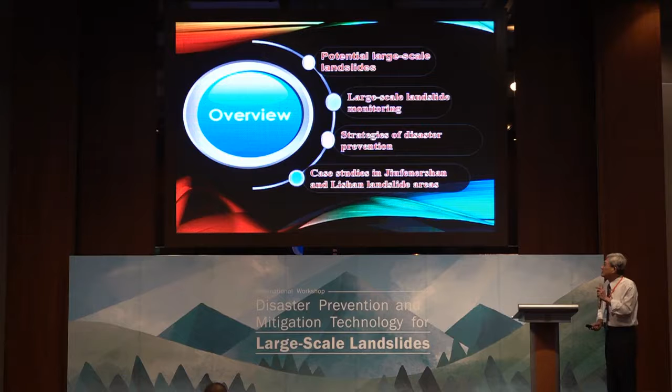I'm going to continue from the potential large-scale landslides and talk about what we can do with those landslides, what kind of monitoring instruments we can apply to identify the risk of a specific site. Then we set up some strategies in facing those landslides, and the government is doing this right now. I'm going to present two very large-scale landslides we have met in the past 20 years. The story is from 25 years ago, and it still continues.

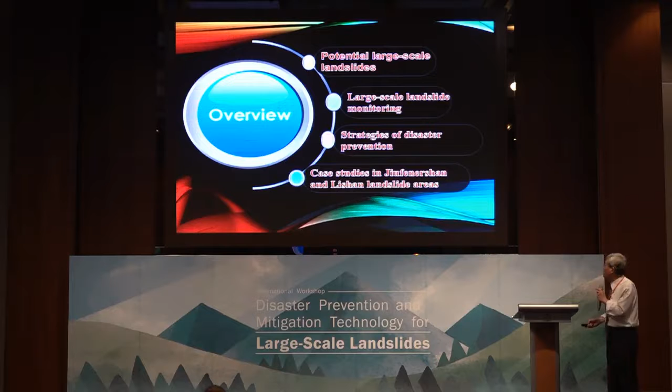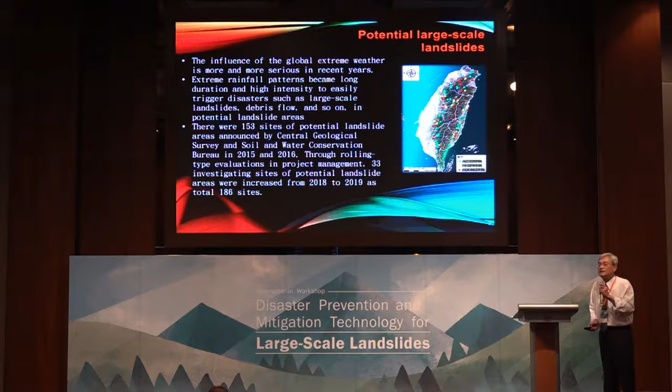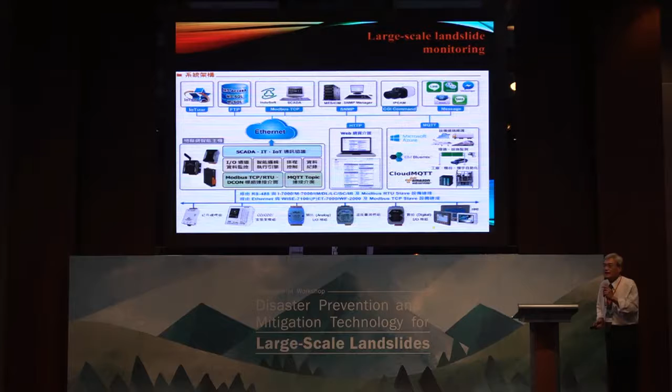You see those dots, a lot of dots, and that means a lot of potential landslides. We chose 186 sites judged as possibly damaging to the human beings in the surroundings. So the government agency applied the network to monitor 34 sites distributed around Taiwan.

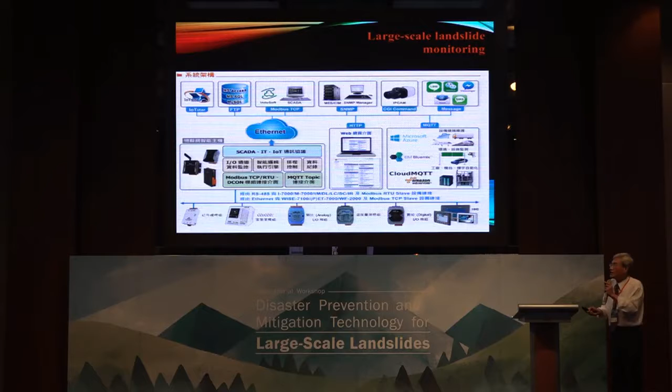We try to come up with all the new technology, including the internet, the recorders, everything, and the cloud. Right now all the monitoring data are on the cloud, so people can access any point at any time. We're still working on it. You can see all the detail in your handout, so I'll go through it very quickly.

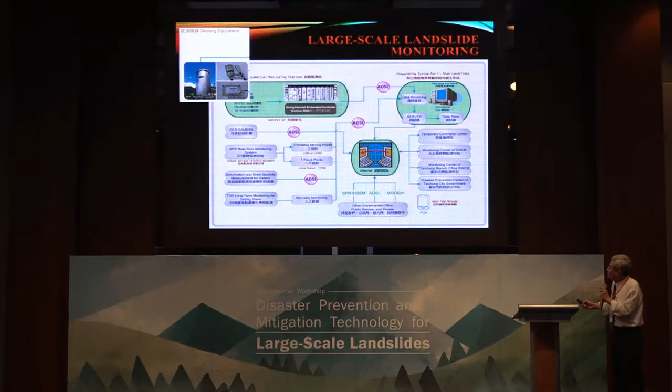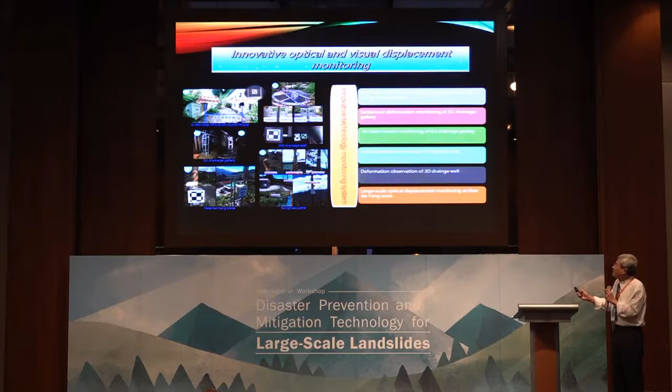The basic instruments we applied include the rain gauge, the two-dimensional inclinometer, and everything you can imagine. And we try to develop more artificial intelligence embedded instruments, including inclination and deformation, which we count on to judge the landslide. That's something we applied. Still too long, so I'll just show you the results.

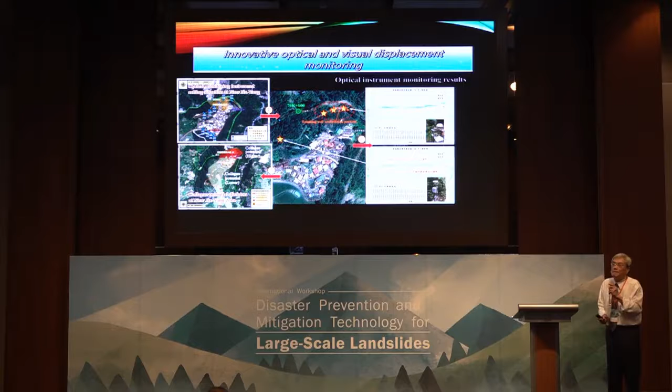This is the result from a site. On the left-hand side you see two pictures; that's the location of the monitored point. To your right-hand side you see two lines of the deformation, and the red dots show the increase of the deformation with time. That's what we have right now at one of the sites.

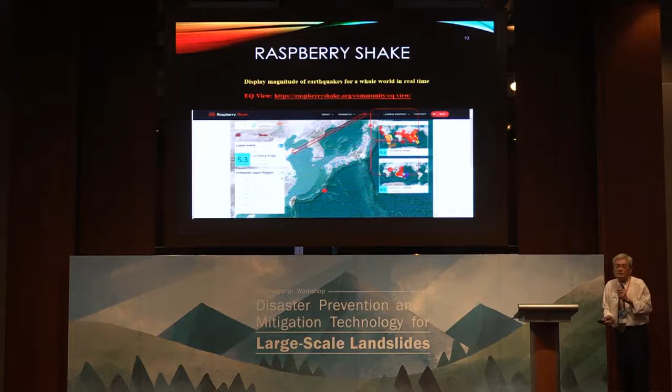We try to employ something from Raspberry Pi. That's the Shake system, a system developed in America. They are trying to put out as many three-dimensional earthquake monitors as possible, and they're now distributed on every continent. They have a cloud to show real-time data at any time from any place, and we are part of it.

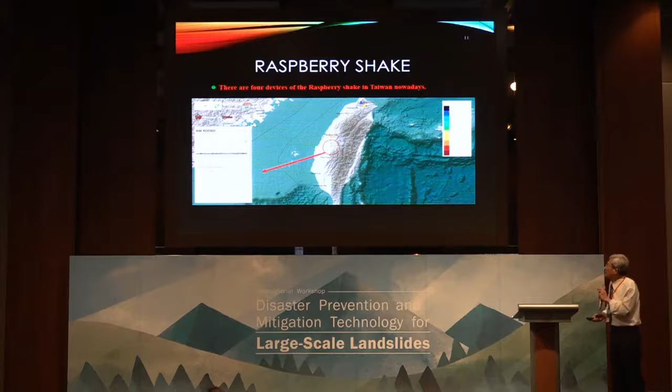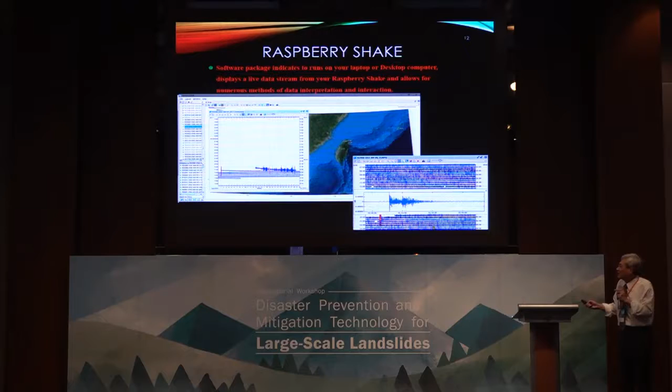Some people may have heard about the recent landslide. We put a few of the Shake systems there, and it really worked and gave pretty good results. This is a seismograph from 80 meters underground in Lishan, and it gives very nice real-time data in the cloud. And there's another system we try to employ, the BBC micro:bit system.

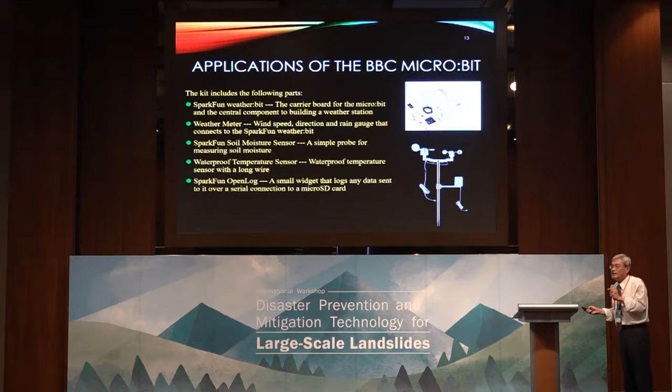This is a very cheap weather station, and it is still on the cloud. They try to have one in every family. If you build a weather station like this, then all the world can see the climate change and everything. It is a very miniature weather station, which works well.

And now, as I mentioned in the beginning, we have so many landslide sites. So what can we do? In order to protect local residents' safety, we set up 7 different intensity activities for strategy.

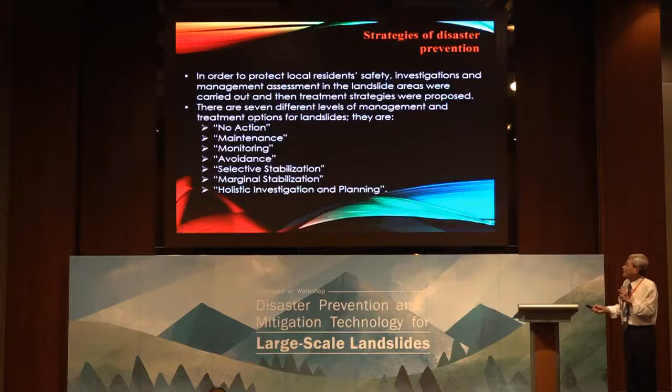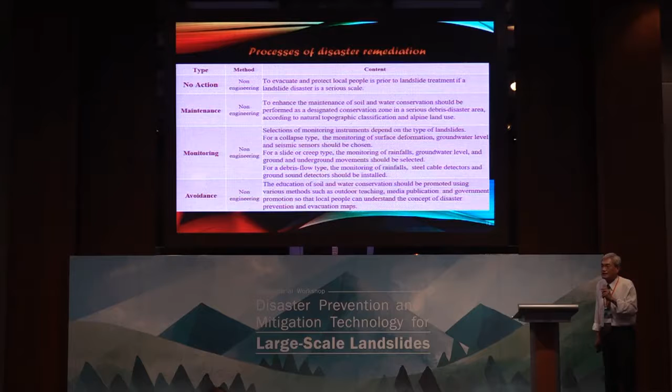Here, from a management point of view, I wrote down the non-engineering activities. First, when we are facing some site that is too huge and cannot be controlled by any engineering device, we suggest that there is no action. You just have to avoid using that kind of land. So you have to just get away.

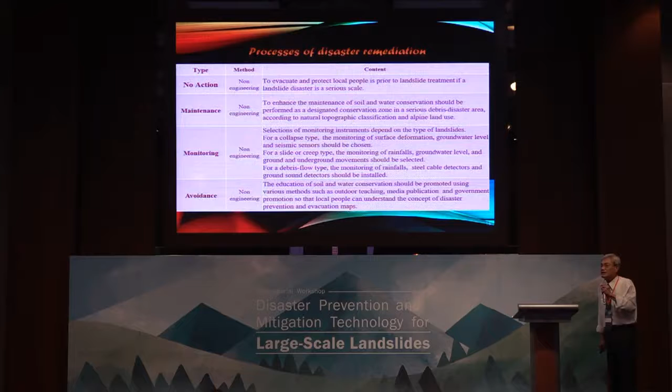In the past, many sites have been performing maintenance activities from the Soil and Water Conservation Bureau. When we're facing a site, we do some management work and just don't let people get hurt. And for some important sites, we suggest a monitoring system is a requirement, and try to use every kind of instrument to protect or to detect the possible disaster, and at least we need to know in advance.

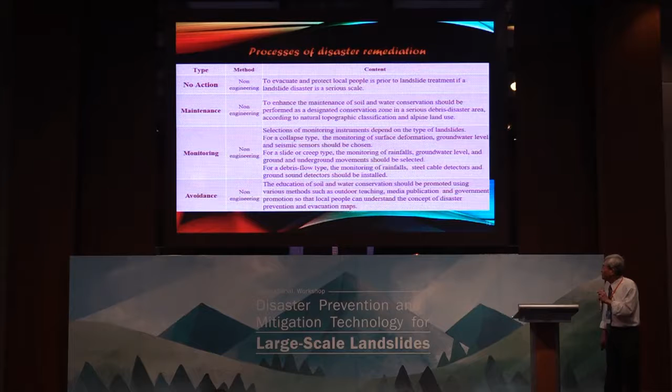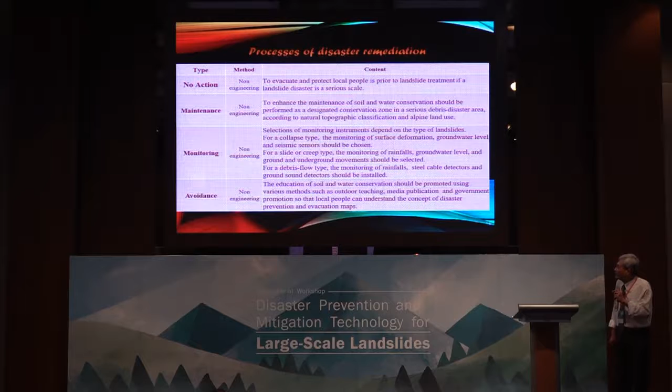The two sites I'm going to present to you are where we did a lot of monitoring work. And the last one is avoidance. For some sites, the Bureau is developing the disaster prevention and evacuation map, just like the title here, disaster prevention. We have all the evacuation maps prepared, and people can just follow what the government suggests and try not to get hurt.

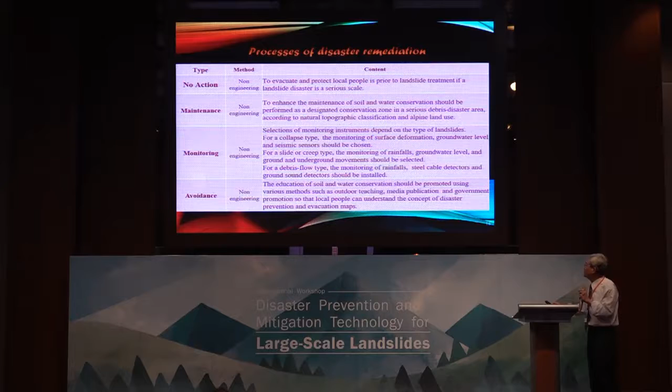And for some sites, they have to perform remediation work. We suggest dividing it into 3 different strategies. First, selective stabilization: we just choose the easy job to do. Second, marginal stabilization, which just tries to protect people from getting hurt. And the last one, when we are facing sites that are so important they cannot be abandoned, we have to perform the full investigation, planning, and all the remediation work.

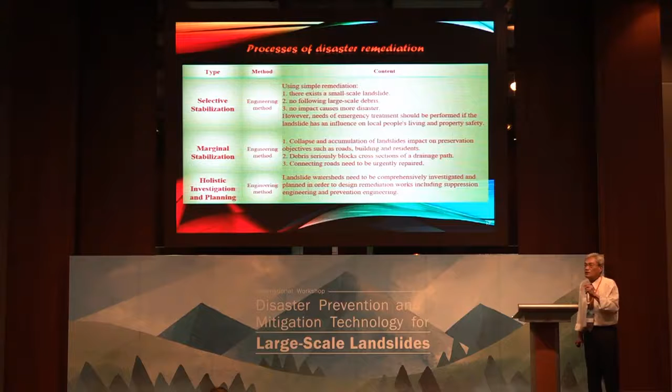So I'll use 2 case studies to present to you the remedial work we can do for landslide sites and the monitoring system for landslides. At the end, I'll talk a little bit about sliding plane monitoring using time domain reflectometry; we just finished some important conclusions, so I'd like to introduce them to you. For the 921 landslide, this is a landslide site that is quite huge.

It happened in the Chichi earthquake, an earthquake-induced landslide, and this is the location of the site, in the central part of Taiwan. This is a picture taken at that time. You see a big dipping slope slid down to the valley, filled up the valley, and formed 2 landslide dams. At that time, people didn't know what we could do facing this kind of large landslide. So the government decided there was not much we could do, so we built a spillway.

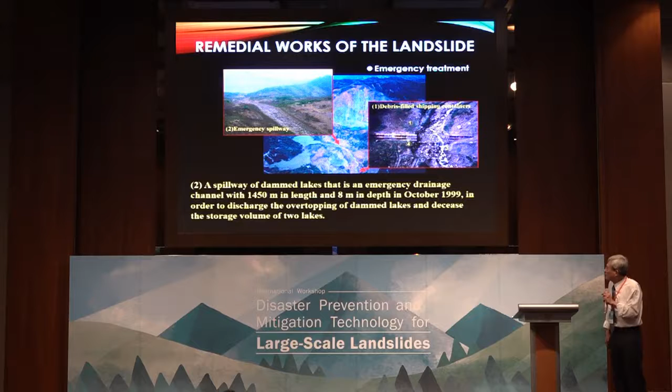That is what happened in 1999, some 20 years ago. We're going to have a 20-year memorial, maybe a meeting about that.

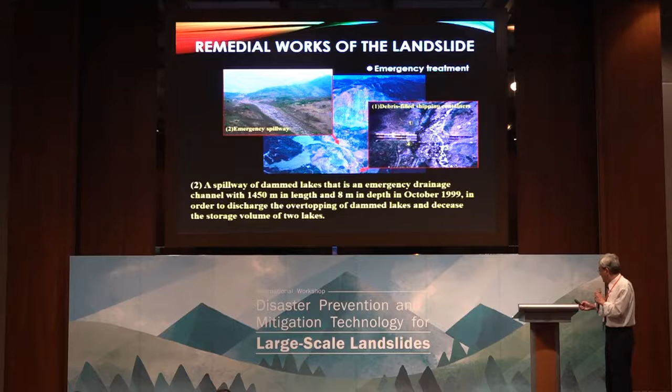The government set up the mitigative measures, and after that we tried to check the stability of that spillway. After the spillway, the government built 20 column-type submerged dams. That is what you see in the picture, the small ones.

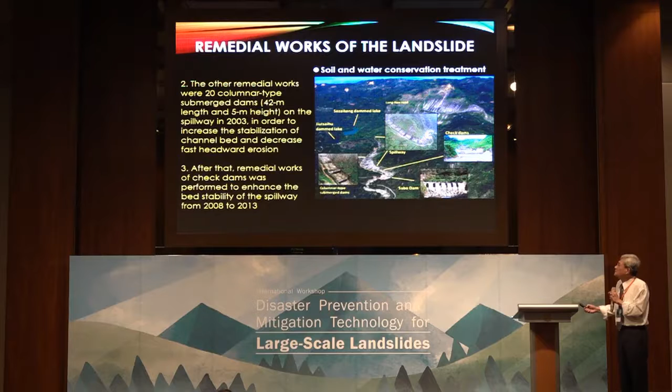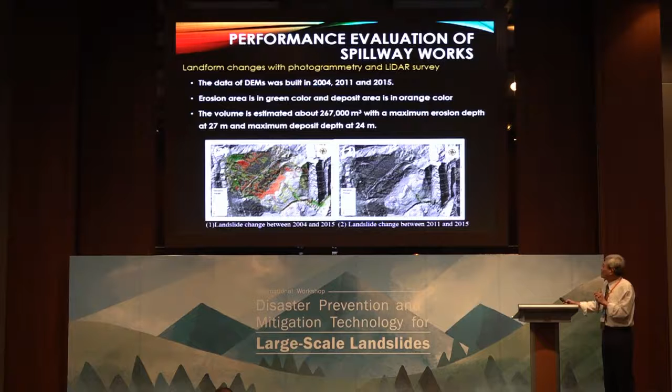We used air photos and LiDAR surveys at different times to evaluate whether the spillway is safe or not. This picture shows the change between 2004 and 2015; the green is erosion and the red is accumulation. You cannot see too much, but I like this picture. It shows the change of elevation of the spillway, and I always use it to show people that the site at this moment is still safe.

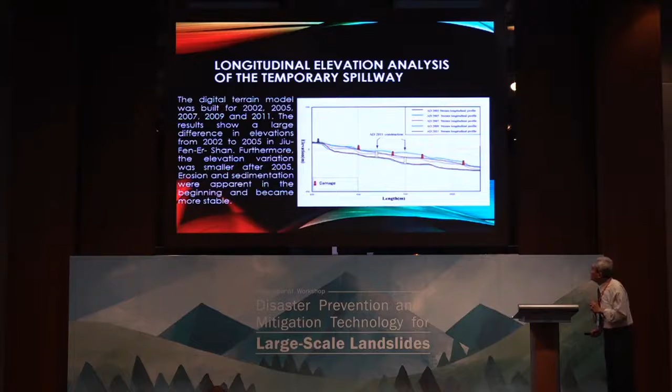We located a profile along the spillway; maybe in your handout it's clearer. That is the dam we built inside the spillway, and you see a small portion of it is cut down very deeply. So I go back here and enlarge the incised section. The small red dam on the graph is the originally built one, and the yellow one is what the government rebuilt at a lower elevation after the spillway was cut down.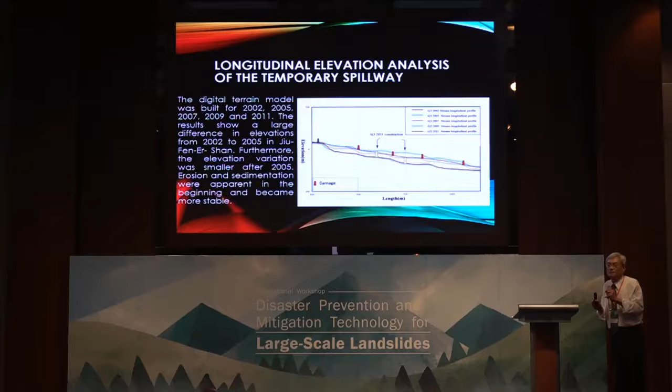Yeah, that's for Jiu-Fen-Er-Shan. You can get information from any report. I think in Taiwan many people do research on this site, so there are many papers published. And I always use this one to show the current status of the safety of the spillway for Jiu-Fen-Er-Shan.

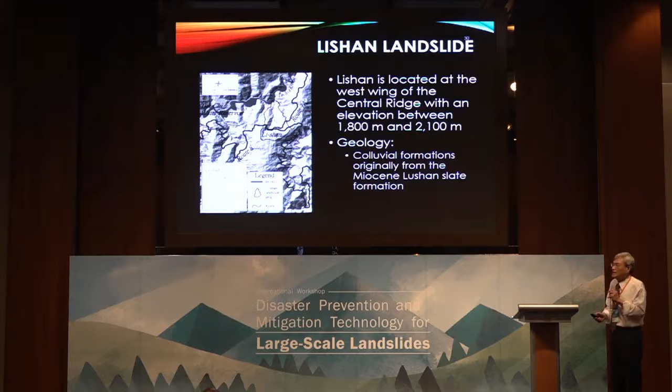So another site I'm going to present to you is the Lishan landslide. This is a site that slid very close to 30 years ago, 29 years ago. We have a lot of research on this site, and very briefly about this site.

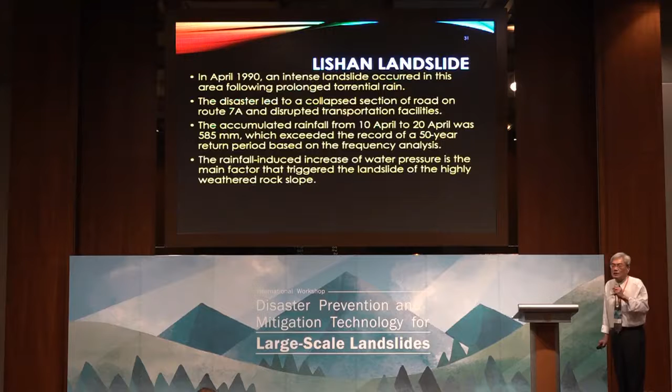In April 1990, an intense landslide occurred in this area. This is a high mountain area, which is very important for the land, because we have cross-island roads close to this site, so we have an important watershed to protect. So the government decided that we have to save this site.

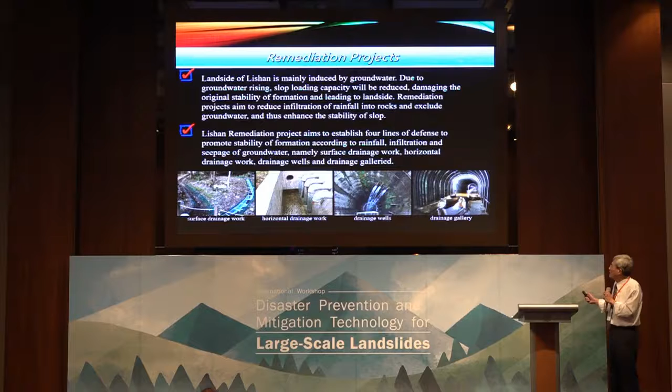So a lot of effort, and this is a picture of the remediation project. The remediation work included surface, subsurface, retaining wall, and everything we can do. So we have the drainage well, horizontal drain work, and a drainage gallery, and the gallery right now still looks kind of safe.

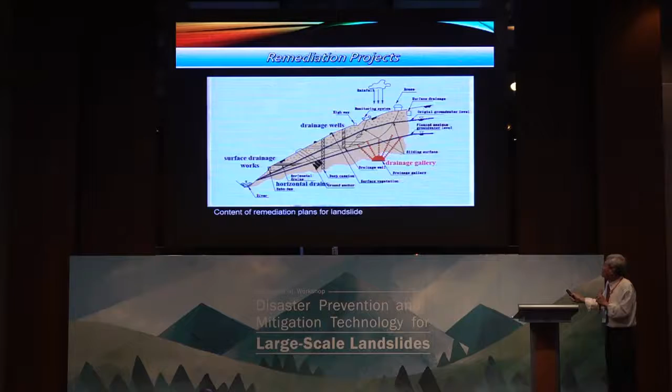And in this picture we see the whole three-dimensional drainage system. After working for a few years, they found that the outlet pipe of the drainage well is very easy to be destroyed. So they decided to run a drain pipe from the drainage well down to the tunnel.

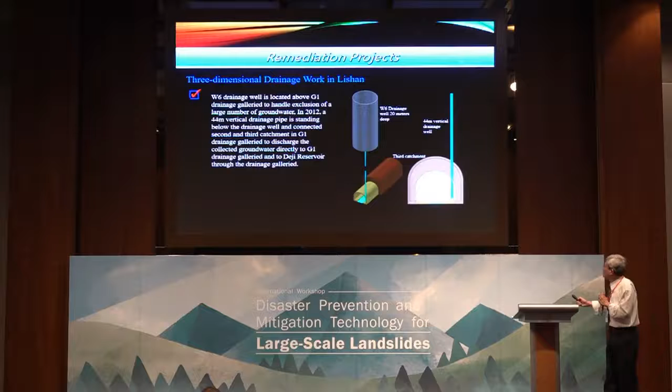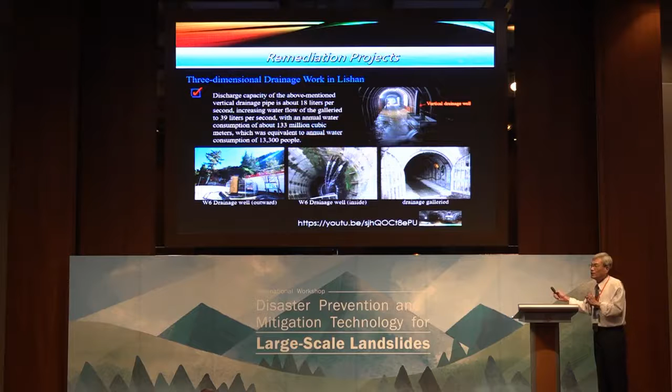You can see the drainage gallery and the site, and we even put a hydropower plant in it for emergency electricity use, and it works, but it's very noisy. And because the drainage works well, we have put a few more sites around it.

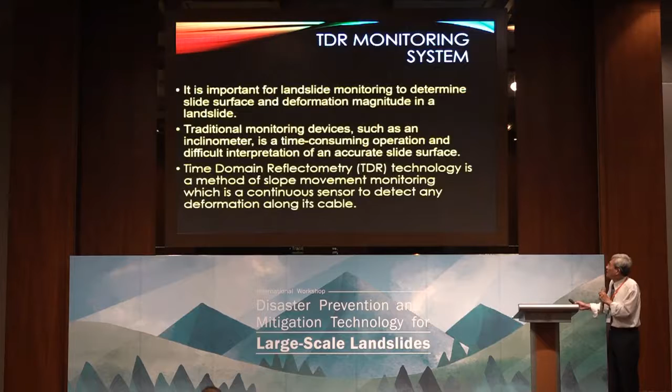At the last, I think it's about time, so I'll give a very short talk about time domain reflectometry, which we applied for monitoring slope movement. That's a chapter we just wrote in Landslide Journal. The system is quite simple. We try to monitor the sliding plane underground.

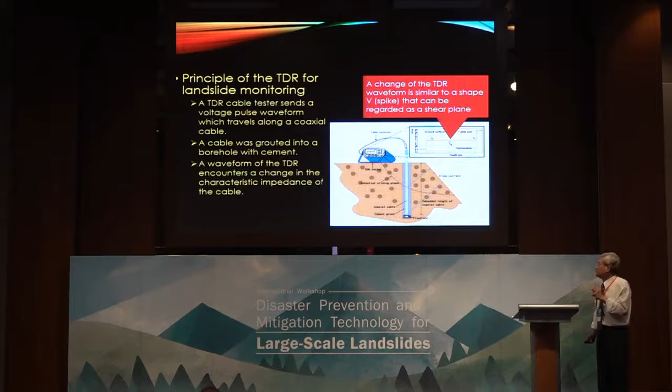Traditionally we used an inclinometer. With an inclinometer, you drill a hole, put in a pipe, and try to measure the deformation of the pipe. Some time ago we developed the TDR coaxial cable, and we use the coaxial cable to replace the pipe, and it gives a very clear result about the sliding plane.

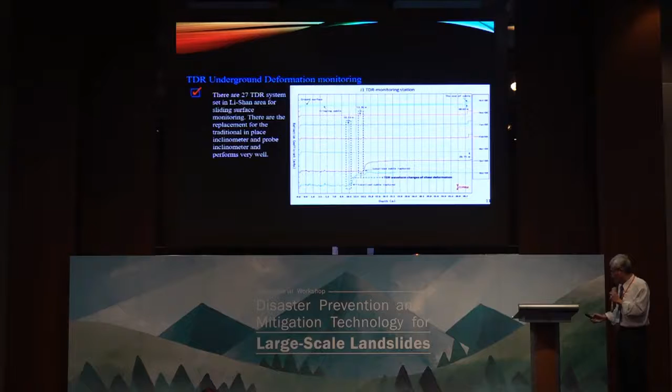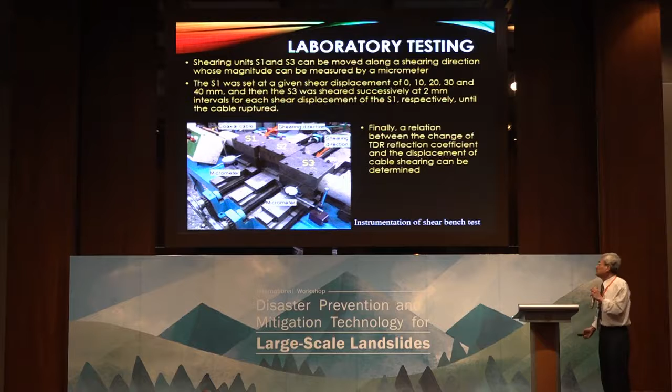You see that every line here is a waveform we took once every month. The change of the shape of the waveform means the development of a sliding plane, so you can see the development very clearly. And we do some lab work to simulate what will happen in the field, and we get some results I'd like to show you in this slide.

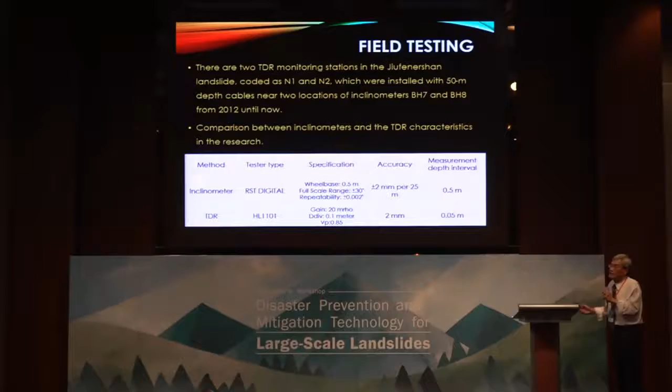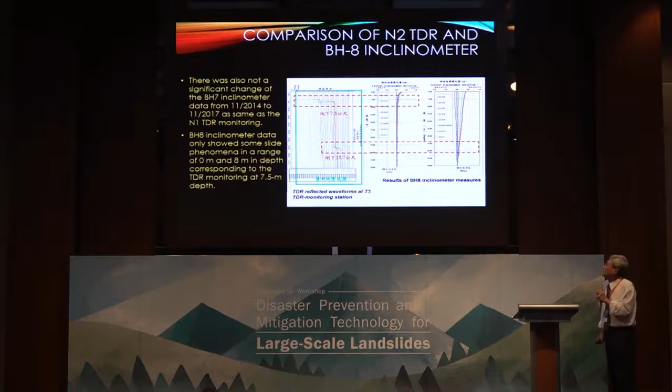We put a TDR cable together with an inclinometer right next to each other, like 20-30 centimeters apart, and that is what we get. You can see we get a pretty clear sliding plane from the TDR signature compared to the result from the inclinometer. That's the data, and we just finished developing. At the end, I give the references if people would like to see more detail. And that's my presentation. Thank you.